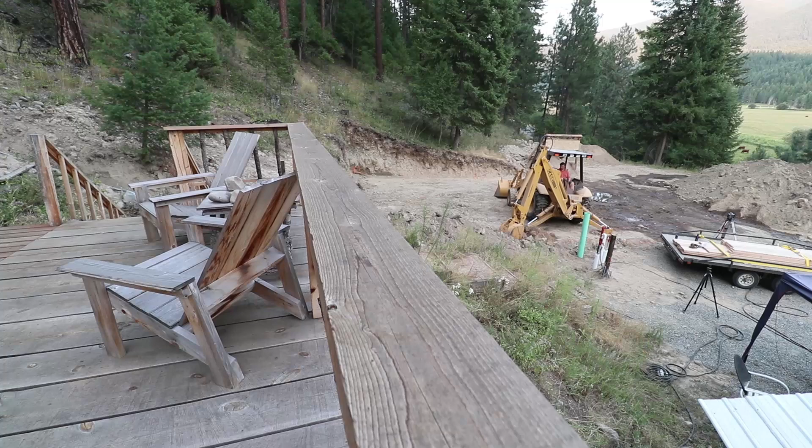Yeah, we had footing plans when we were doing the footings, and then we had wall plans when we were doing the walls, but we didn't have a complete house plan before we started. That's probably a completely different video as to why we did that and how it's worked out. But anyway, that's why we haven't shared our plans yet. Just a tiny bit of backstory.

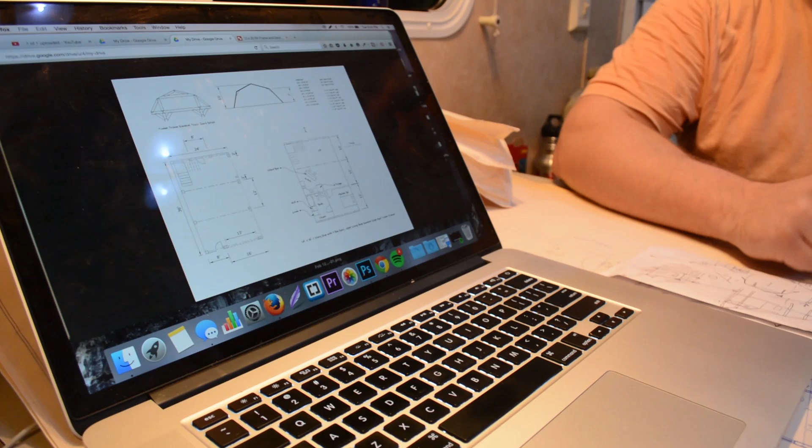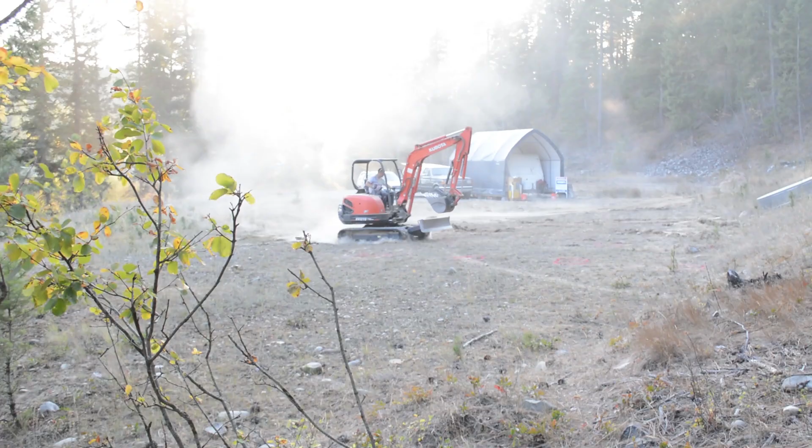We never planned to build this house this soon. This was our 10-year plan. And we're in year number 2, and we're starting the house. When we first arrived, we had drawn a very simple 24 by 36 gambrel roof, timber frame garage with an apartment above it. And we had dug the footings and we were ready to go. And we decided not to build that. We had a couple of revelations.

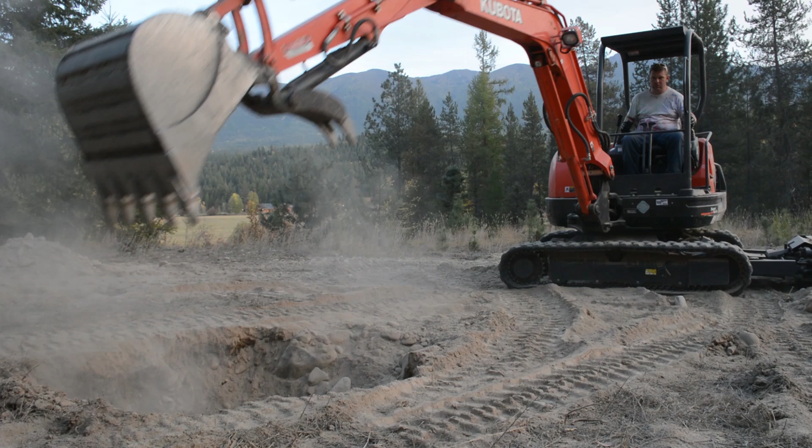One, our property is extremely hot. And because for the time being, we're off grid and we kind of want to stay that way, we realized really quickly that in order to make a home that was comfortable, we would probably want to harness the hillside as a method of maintaining a moderate temperature. So we scrapped the idea of building that house immediately.

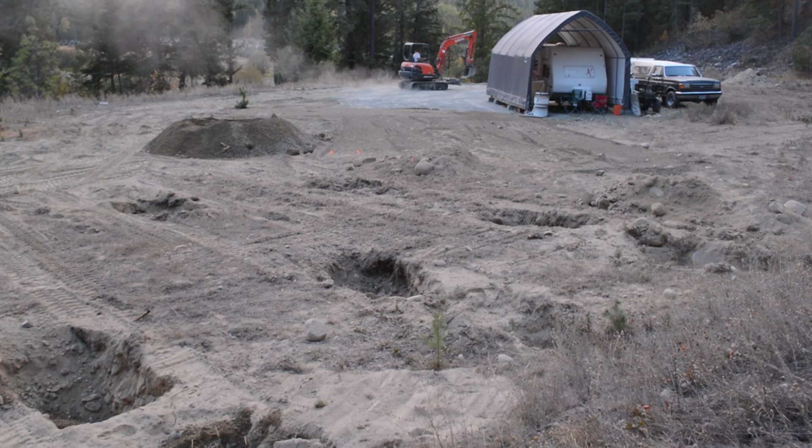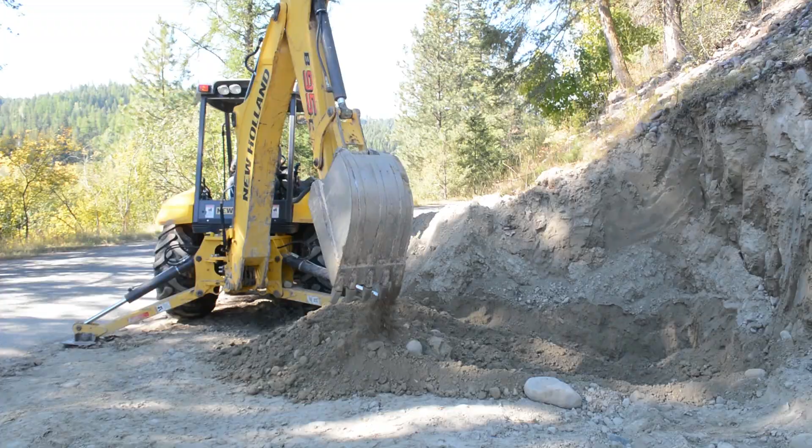We didn't really have a plan B, but life kind of got in the way, and we decided to explore and have fun with other things, such as gathering food, getting firewood. That's why we built the cabin. There was a lot of kind of reactionary steps. So, over the last 2 years, it's become obvious to us that we really don't know if we have it in us to build like 2 or 3 different houses on this property. So we thought if we could, we'd rather just build the house first, even if it takes longer and it's a little bit slower.

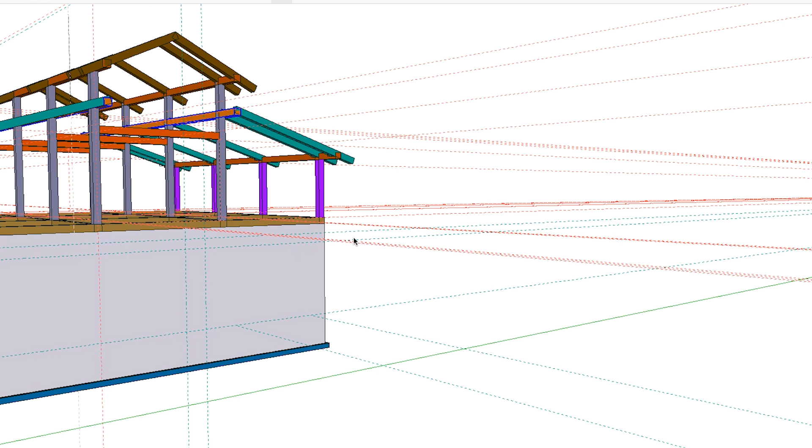For quite a while, Alyssa and I had talked about different house shapes, different house sizes, and it became obvious that we really needed to start working harder on the floor plan, because the floor plan really does dictate the structure in many ways. And so over the winter, I had taken a couple of days here and there, and I had worked on using SketchUp. And I had drawn up a couple of different timber frames that I thought we might like.

But I didn't fully understand the engineering behind those frames, so I couldn't confidently say we can build this. And that kind of led us to another conversation where we felt like we needed somebody to help us draw a more visual set of plans.

One thing that's definitely a marked difference between Alyssa and I is Alyssa is way more visual. She needs more details in order to fully visualize something. And having a good rendering of a home helped her to understand what I was trying to communicate with my chicken scratch and my 3D drawings.

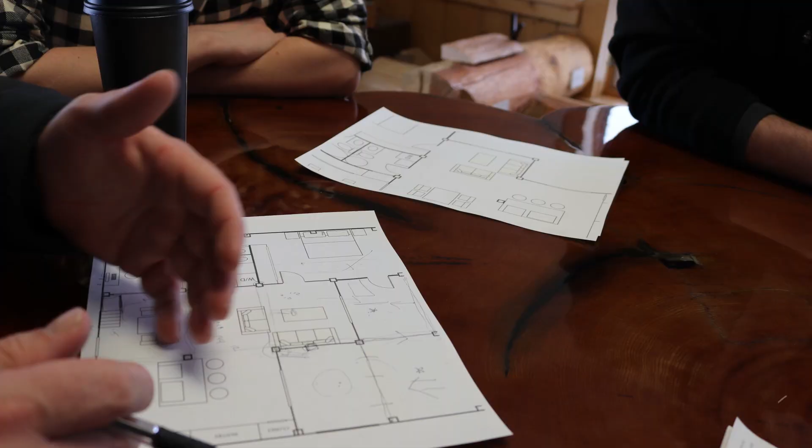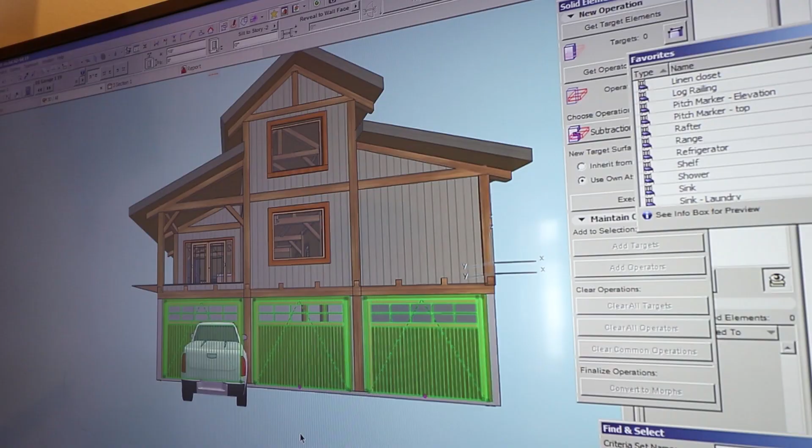So we ended up employing someone locally as a drafter to kind of help us conceptualize the structure that I had drawn. And they have software that allows them to put in roofing and materials and furniture and really make it look like a full home. Unfortunately, the outcome of that was a structure that wasn't really buildable, and our floor plan in that structure was atrocious. Let's back up a minute.

Here was our very, very first iteration. This is a 24 by 36. We, for some reason, I don't remember why, decided to go with the single pitch roof. We did that because of the south view. So our original plan before we even showed up to the property was a gambrel roof.

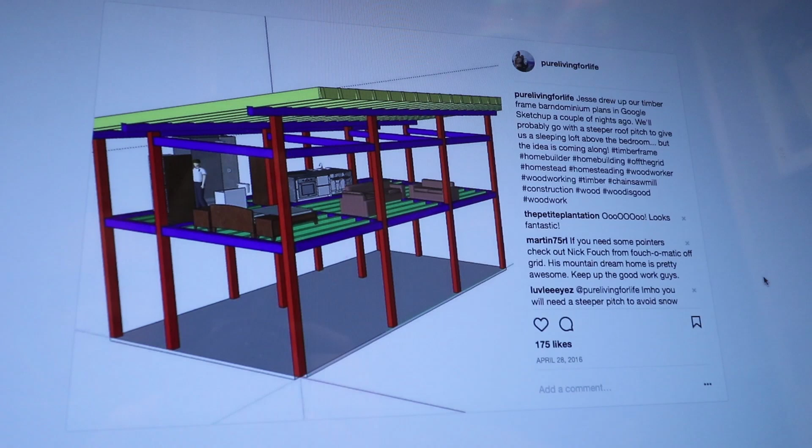And that was mostly because the length of the timbers to build a gambrel is shorter than the length that you need to build the frame you're looking at. So those rafters are very, very long. They're like 30 some feet long. But once we got here, we realized that with a gambrel roof, something like this, you would have very little light coming in from the southern side. I remember that. And so we thought that was a terrible design.

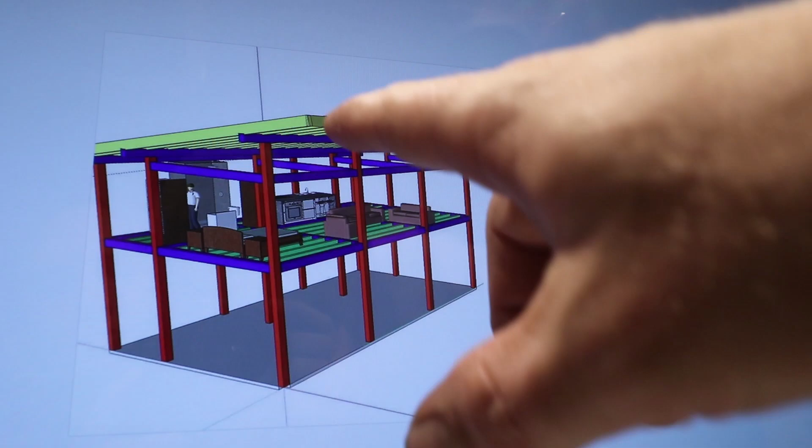And so we started rethinking the roof to capture the southern view of the property, which is something we've still done. And that kind of led us down the simplest method. My dad calls it a chicken coop roof, which is a single pitch structure. So that frame we just showed was a frame that we felt was too small.

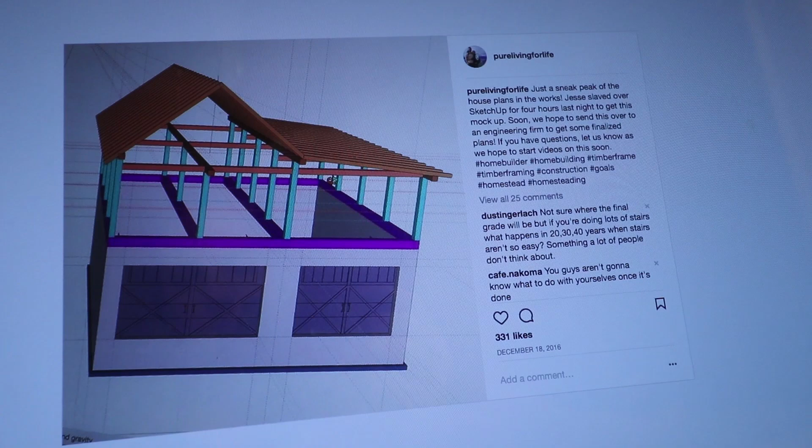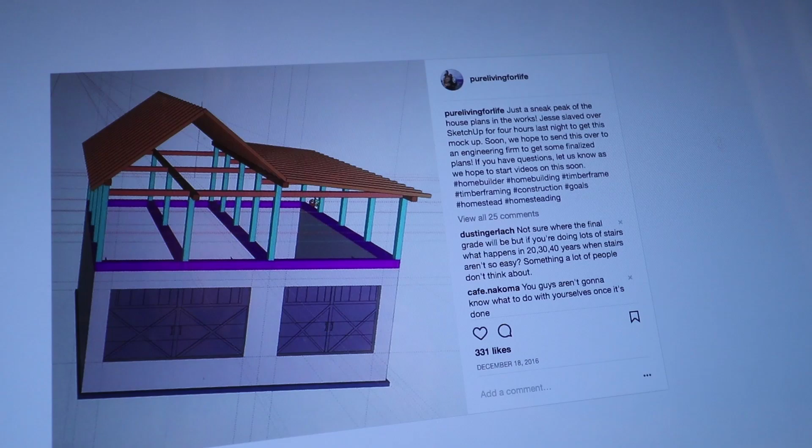And after we had met a local contractor, and he informed us that a 24 by 36 garage was not really adequate for what we were trying to accomplish, we began kind of exploring the 36 by 36 frame. This one I think was actually like a 32 by 36 or some slightly larger frame than a 24, but it wasn't a full 36. So it was a very awkward design to try to figure out.

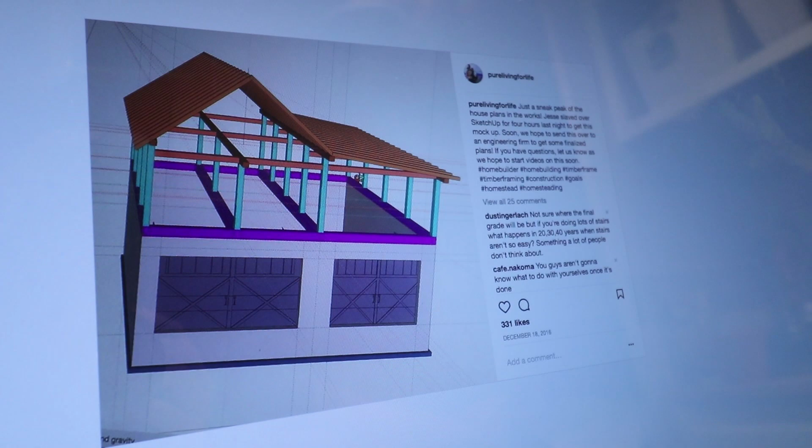And we were trying to break up this roof so that this wasn't one gigantic rafter. But again, we were trying to pick a frame and then make a floor plan that worked around it. Our biggest fear with this one was that it would look weird. Well, what's funny is when we went to the timber frame workshop in Maine, we actually got to see several versions of this frame, and they don't look that weird at all.

But they also weren't two-story on top of a garage. They were on the ground, so they had a more grounded look. Anyway, we felt the roof line was really kind of screwy. And that kind of brought us up to the next iteration of the plan. Well, even this, if you have a set of stairs going up to the loft, is going to be extremely small. So unfortunately, you're losing out on tons of space.

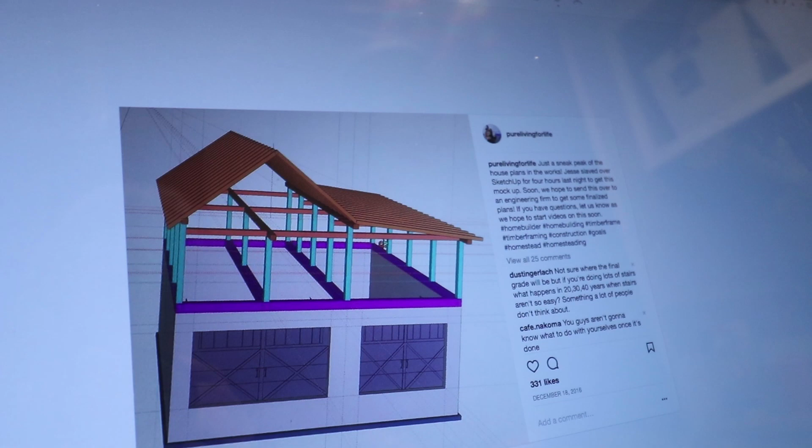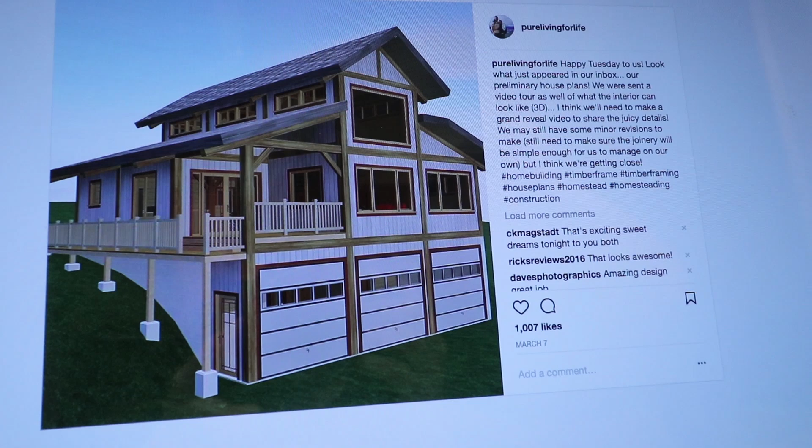Here was our third iteration. This could be built, but the company that we were working with to design this house, they focus a lot on using steel in their post and beam structures. And that's not something that Alyssa and I were super passionate about. We wanted to learn and use joinery. It was something we really wanted to do. And so this is a very buildable structure, but not for us. The overall design would have to be highly modified in order to make the joinery work.

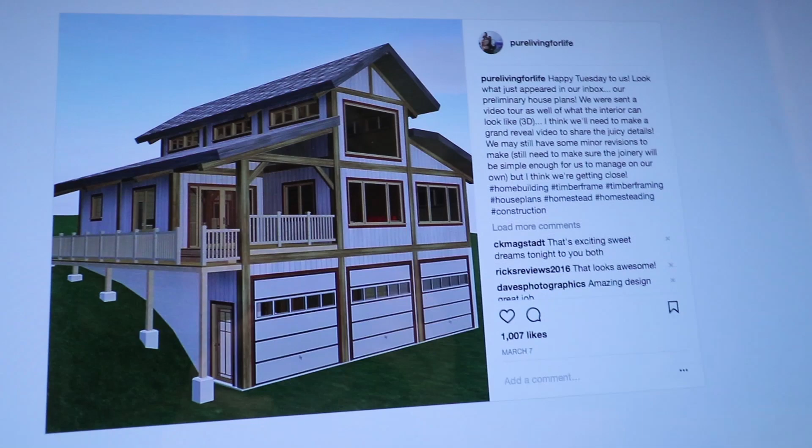And probably the biggest problem, so this design is actually a response to the previous roof line. And through conversation and kind of exploring different roof ideas, this design was decided upon. It's more of what's called a monitor style house. So you have a gable in the middle instead of on one side or the other. Back her up. And then you have a lean-to on either side. It minimizes the roof spans, which is nice. It gave us a lot of light up here because we had all these windows in this upper area.

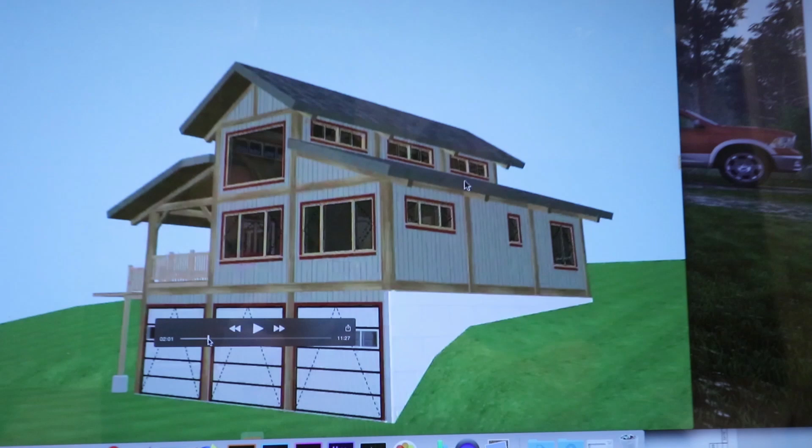But overall, we again ran into this massive floor plan bottleneck. So we couldn't figure out anywhere convenient to put stairs, which everybody tells us is a common problem. Doesn't matter what kind of house you build, nobody has room for stairs. And the floor plan just didn't feel open the way we wanted it to feel. Everything felt very boxy. Every room felt like it was very isolated instead of having this more open feel.

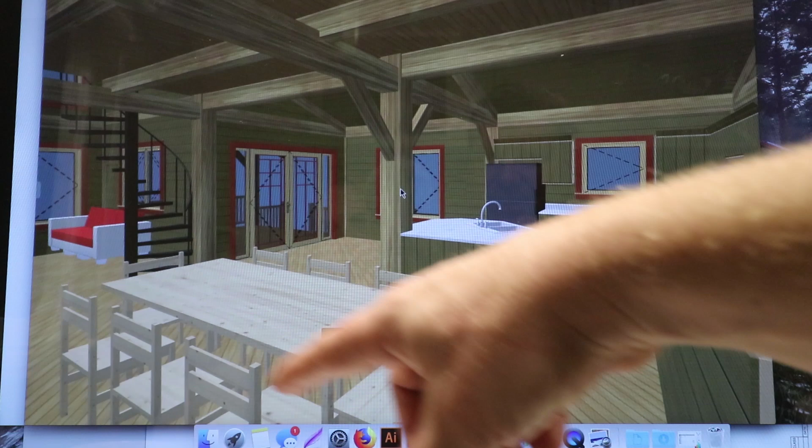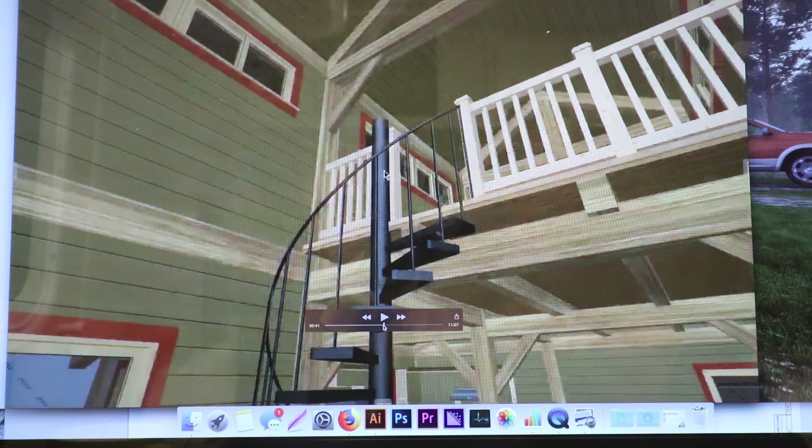Like this view from the kitchen, we felt if you could stand in the kitchen and look over to the living room, into the dining room, it would feel very open. But when you look at the layout of the floor plan, it doesn't feel that way at all. There's posts intersecting things. The living room is extremely tight. It's very cramped. We had, I think it was Shelter that cautioned against using a spiral staircase.

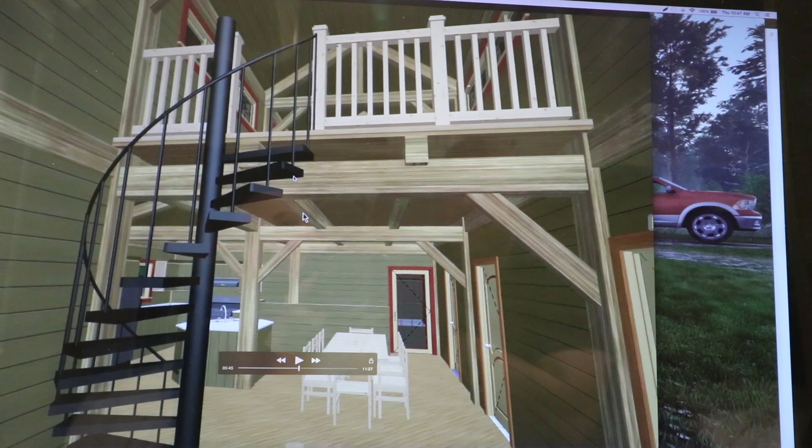They're extremely romantic, but the reality of them, they say if you can fit normal stairs in, you'll probably thank yourself. Especially if you plan to use the space. If it's not something you plan to use, then a spiral staircase is an acceptable alternative. But if it's a usable space... This wouldn't have been an everyday space up here, going up and down those stairs. There wasn't going to be a bathroom up there, no full-blown bedroom. It literally would have been a loft, probably for guests. Not a lot of privacy.

One thing we really wanted on our house is a wraparound deck. And for this particular set of plans, we decided to have the deck sitting within the floor plan versus building a deck on the outside of the home, and it really encroached on the floor space.

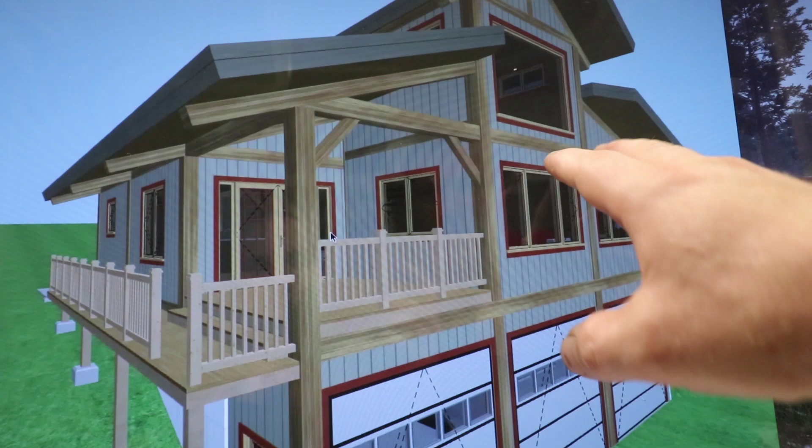Yeah, so with this structure, instead of bringing the walls all the way out to the eave, we actually recessed those walls slightly, and extended the eave so that we would have a covered wrap deck, which we wanted because we wanted to be able to walk between the front and the back of the house without having to go down to the ground. Because it's so far up off the ground.

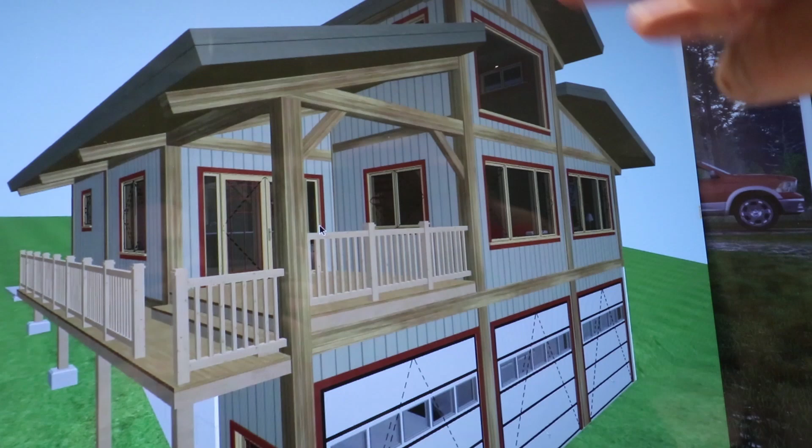And doing so makes it very difficult because of the roof pitch coming to this side, the east and west side. This was a really great idea, but the functionality of it we felt was maybe not as good as we had anticipated, and it cost us a considerable amount of square footage in the overall frame. So we decided that maybe that design needed to go.

So in the midst of all this, Jesse said, we need to take a timber framing workshop if we have any idea of building a timber frame together and keeping our relationship intact. Yeah, so maybe jumping back for just a second. So this would have been sometime in the winter, January, February, when we were working on this most current plan that we just shared.

But the previous summer, all summer long, Alyssa and I had done a couple of things. One, we purchased a bunch of timber framing books, and those are amazing books. Maybe we can share just a couple of those toward the end of this video in case you want to read up on the subject. We both read those books, but there was still this fundamental disconnect between the two of us on frames and structures and floor plans and some of these things. And so that made it obvious that we needed to do something hands-on.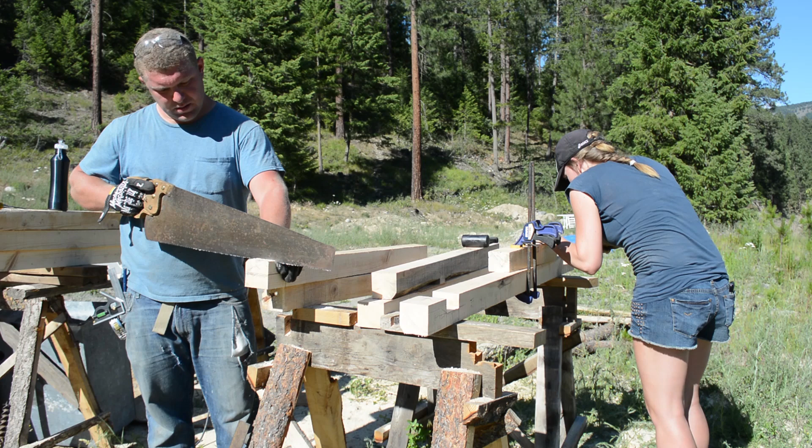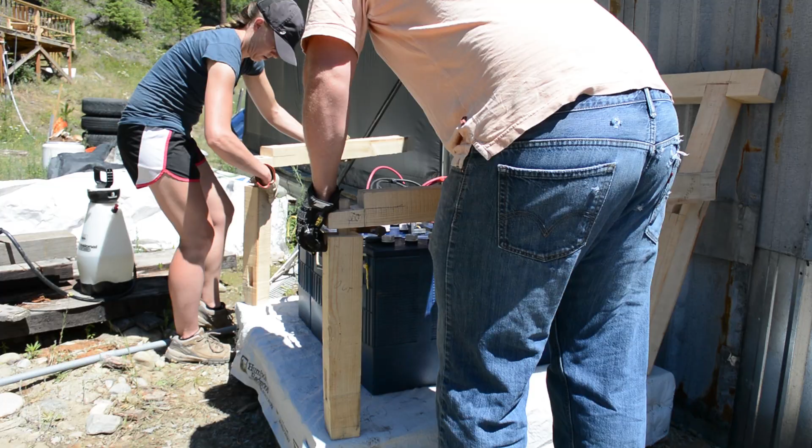Now, we had done a tiny timber frame together. It was our battery box for our solar batteries. It was a very small project. It took us a couple of afternoons on a weekend, and I felt like that kind of closed the gap for Alyssa and I. We were closer to understanding what we're building, but we weren't together. And that's when we said, if we're going to build this house, we have to build a timber frame, and we have to do it together, and it became brutally obvious we've got to take a workshop.

We settled on taking a course with Shelter Institute in Maine. We tried to find one closer, but some classes that were closer that we were interested in were already filled up, and we were looking for something like 2 months in the future. And a lot of timber framing workshops fill up long before that, and we weren't wanting to take one in fall because we were wanting to start building that summer.

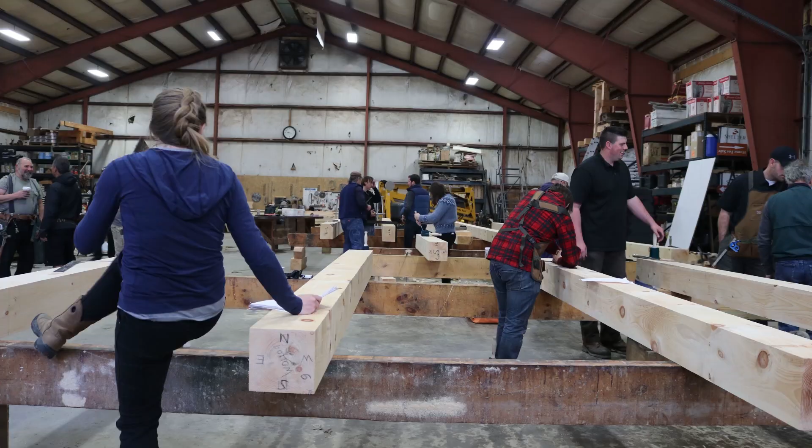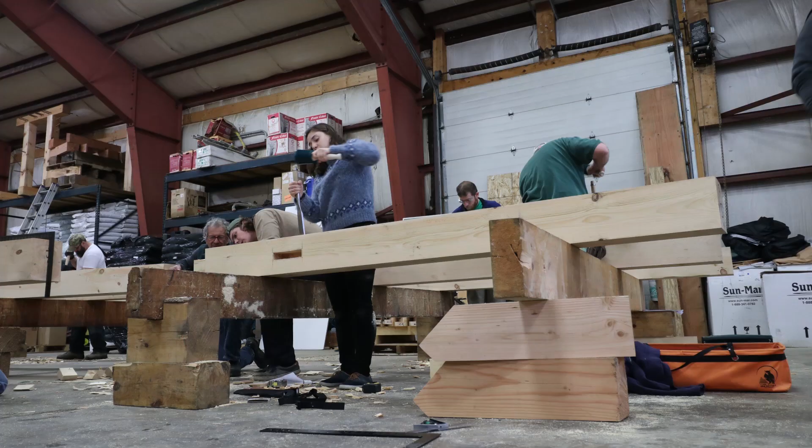And Jesse suggesting we went to Shelter Institute, I wouldn't say it was a hard decision for me, but in my mind, I'm sure a lot of people kind of agree with this feeling. I felt like we have this huge financial burden ahead of us and we need to save every penny for building the house. It was an investment. However, that class opened up our minds so much, and getting to know the Shelter staff was invaluable to us.

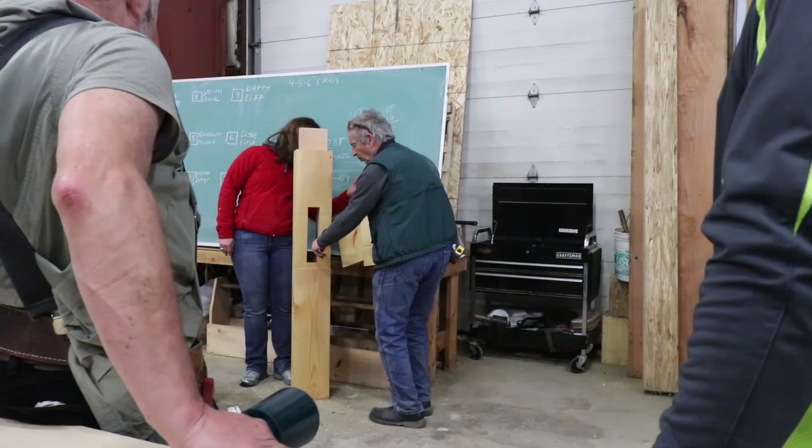And we realized that they were timber framers. Not only that, they do build timber frames, but they're really passionate about teaching other people how to timber frame. Therefore, they welcomed people like Jesse and I, where other businesses don't work with owner builders. So we are like a squeaky, annoying wheel because we have so many questions. We want to do a lot of the work ourselves, and Shelter loves that.

They told us that they were willing to be there for us to hold our hand as much or as little as we wanted. They were willing to engineer our frame for us. They were willing to let us kind of design our frame, but then be willing to step in and do some sort of consulting package where we could work with them on the questions that we had, call them up last minute, really be hands-on with the design, and that transformed everything for us.

For me, especially, I think one of the most exciting parts of the Shelter Institute's Post and Beam class is the engineering class, and they walk you through all the general tenets and principles of engineering timber frames. And I left the workshop thinking, yes, now I can design a frame confidently because I can sit and spend the time looking at different pieces.

And so we also learned a lot about some basic general rules of timber frames. One of those is what they call a stable gable, which is a 12 and 12 pitch roof over a certain width of building that does not require any additional supports to keep it from swaying, sagging, breaking, etc.

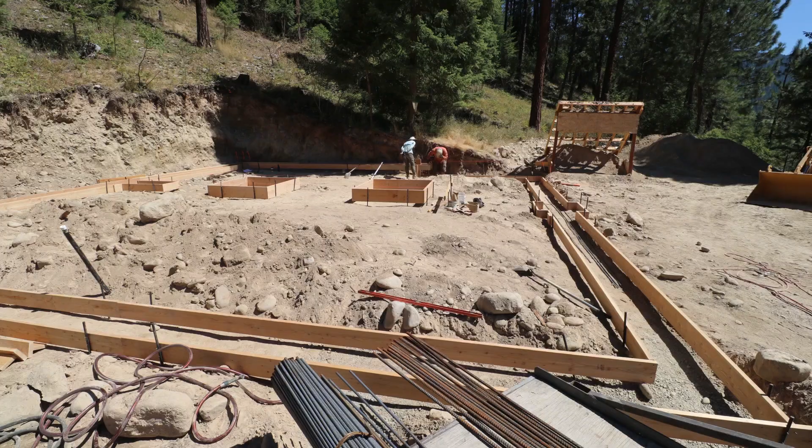And so when we finished the design, it couldn't be extraordinary and ornate. It had to be simple. Our goal is not to be on the front page of a home builder's magazine for the most epic timber frame house in the world. We were okay with boring. And I can say, after putting in a hot summer, I'm happy we chose boring. And I love our house.

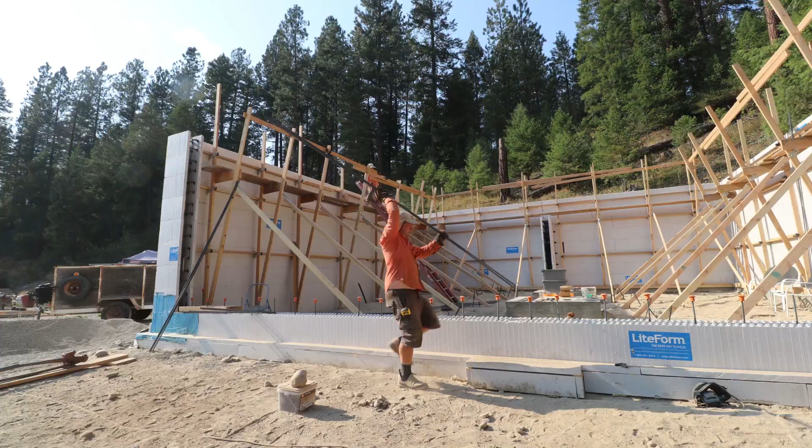Yes, we wanted to just stick with something that's tried and true and fairly straightforward, because we knew that the amount of bandwidth and mental power it would take to build the house would be far beyond our knowledge base, and we couldn't be sitting trying to figure out extremely complex things. We needed it to be pretty simple, a box with a roof.

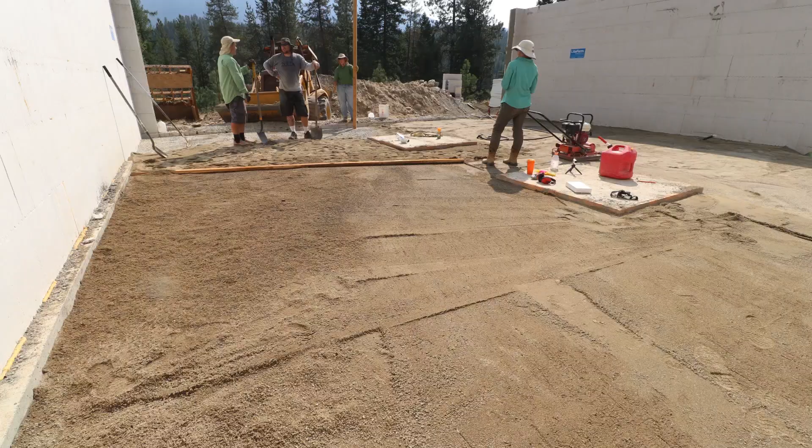And Shelter helped us understand the benefits of simple design. And so that also helped us kind of simplify that conversation in our head about the roof, which was something we had struggled with over and over and over. And we finally came to a conclusion that a simple gable roof, good enough.

Part of what was so attractive about Shelter's program for us was that they build a 24 by 24 timber frame, which is big enough you could do something with it. You could build a garage, a mother-in-law apartment. It could be a house, a cabin. It's a full structure, which is something we really wanted. Alyssa said earlier that we settled on Shelter. We chose Shelter. That's exactly what we were looking for.

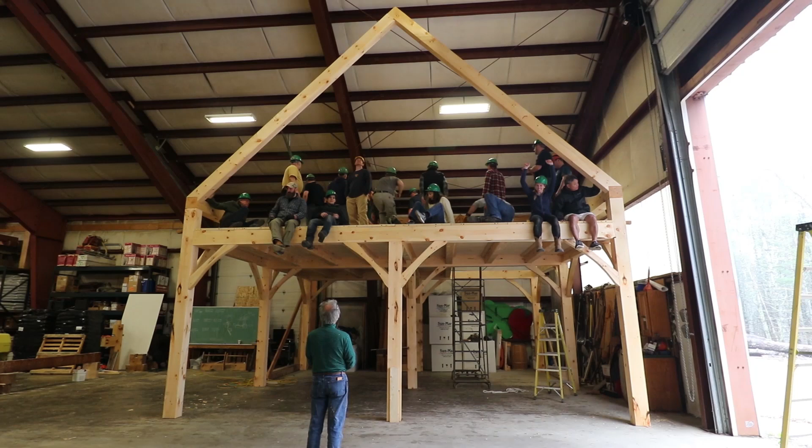And we were shocked to find it, because most workshops, in our experience, are wood sheds or small cabins or smaller frames that teach you the basic principles of timber framing, but they don't give you the scope that we're talking about when we're talking about building a house. And so we were stoked to find Shelter, first of all, and then that there was still room in the class just 2 months away.

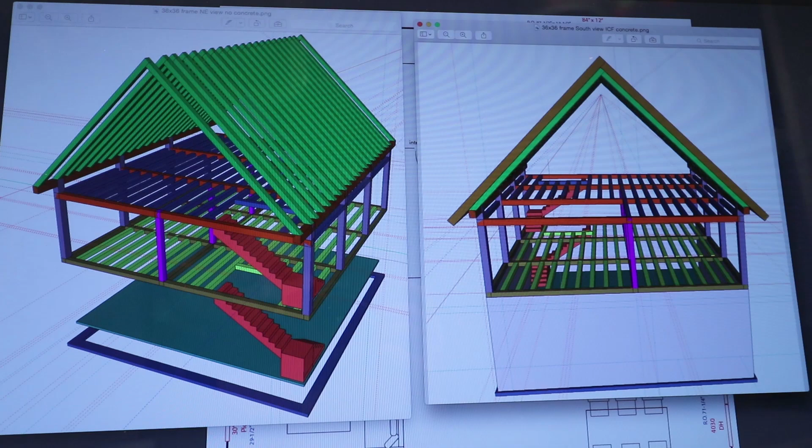So upon arriving home from the timber framing workshop, I revisited the plan that we had originally drawn, and this was one I actually had spent quite a bit of time trying to make the monitor frame buildable. And one of the big takeaways from the workshop was the maximum span allowable in a single bay, which was 20 feet. And so I began designing this frame around a 20-foot span here, which left us a 16-foot span here, and then designed the top plates and the rafters and everything based on the simple gable.

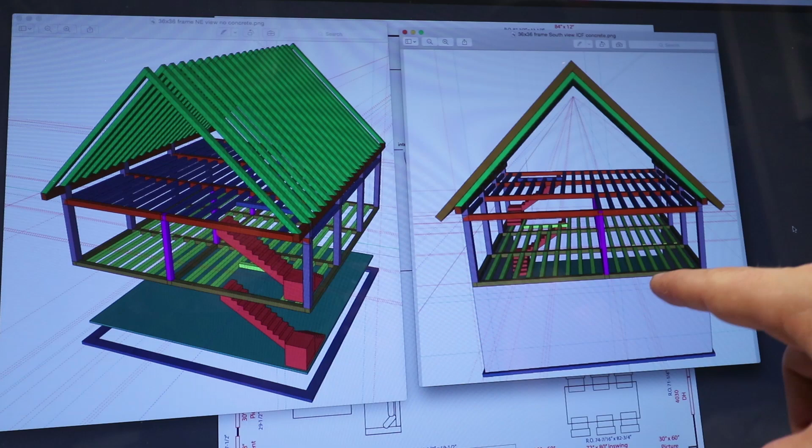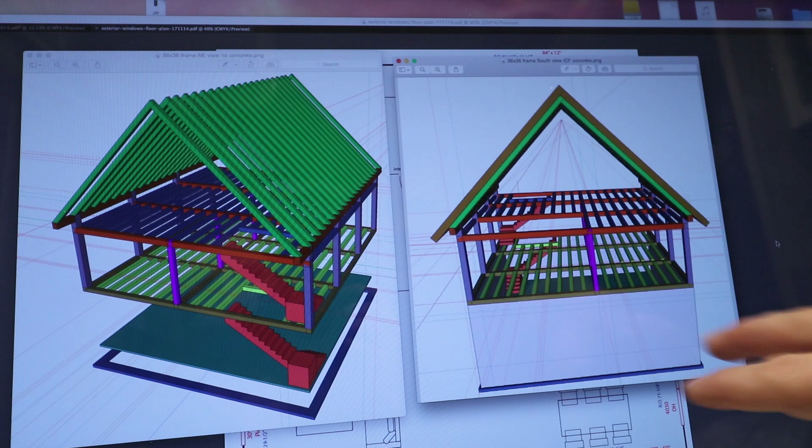And I actually used all the engineering calculations from the workshop to build this frame. So I felt really confident that this frame was buildable. And no one can deny the amount of loft space that we gained by building such a massive roof. This frame, Alyssa and I both liked. We felt that the roof really complemented the height of the structure. That all made sense. Suddenly we had room for stairs both below and above, and the possibility of having more living space without really putting in any extra effort in building the house.

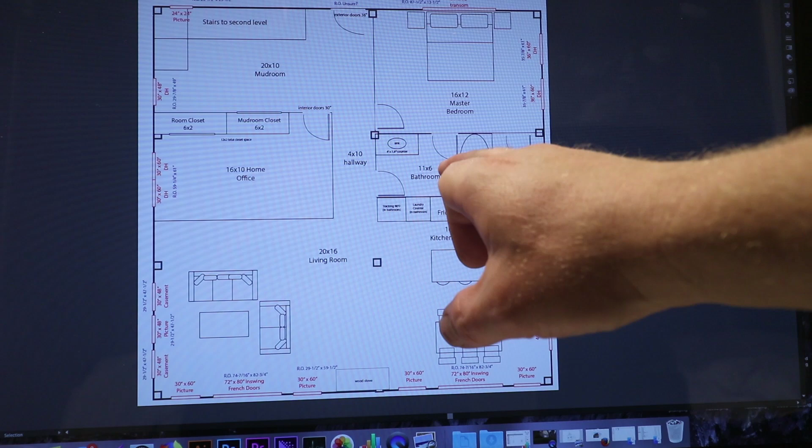While Jesse was doing the engineering on the frame, the floor plan was more up to me, which I'd say worked really well. It took a lot of just moving things around and even tweaking stuff ever so slightly. So for example, the bathroom here, Alyssa really wanted a walk-through bathroom. She wanted to be able to access it from the master, but also from the living area. And that's because we do have a small space and we can't fit 2 bathrooms in there, and we wanted the master bedroom on the living level because we don't want to finish the loft right away. At the same time, we want the option of still closing a door and having somewhat of a private bathroom. So in a small space, I think that worked out well.

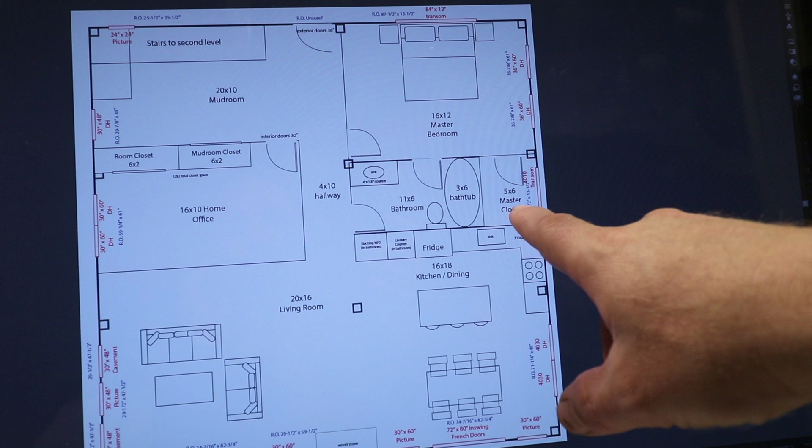Yeah, so it took a little bit of exploring because we wanted to make sure we had a pretty generous closet, which even 5x6 isn't that big, but it's a decent closet for the master. But for example, this post here could be a problem because there's a sink, and so that post is going to intrude a little bit on the interior space.

And we wanted to make sure that we had a very open feel from the kitchen into the living room. We wanted to feel like this was one big space instead of all broken up. And so we needed to play around with, because we had originally talked about putting the kitchen up here in the upper corner, overlooking the hot tub deck, etc. But then the kitchen is its own room, and you're very detached from the rest of the house, which I never want to feel.

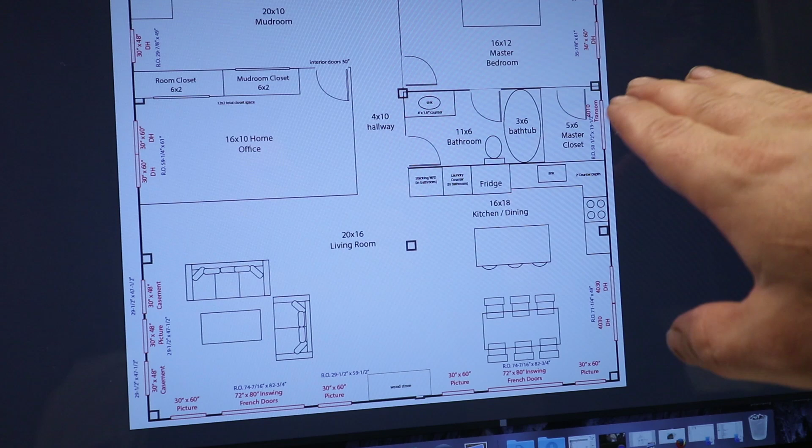And we decided that we're going to spend most of our time in the living area. Therefore, that's where the view should be, and we'll sacrifice on having a view from the master bedroom. Yeah, and I mean, we want privacy in the master bedroom, and we want it to be cooler in the summer for sleeping, so it makes sense to put it in the northeast corner. Probably the coolest room in the whole house will be the master bedroom. It'll be cold in the winter, but for us, adding heat is much easier than cooling something down.

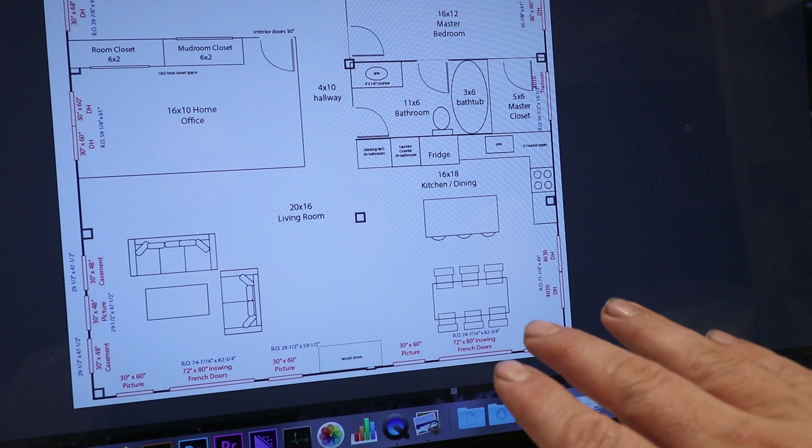We have such a beautiful view that we wanted to make sure that the southern exposure was really rich. And so we wanted to design around having the living spaces on the south side. And we wanted to design around having a lot of natural light coming in. So Alyssa really did move stuff. I mean, I can't tell you how many times this floor plan changed.

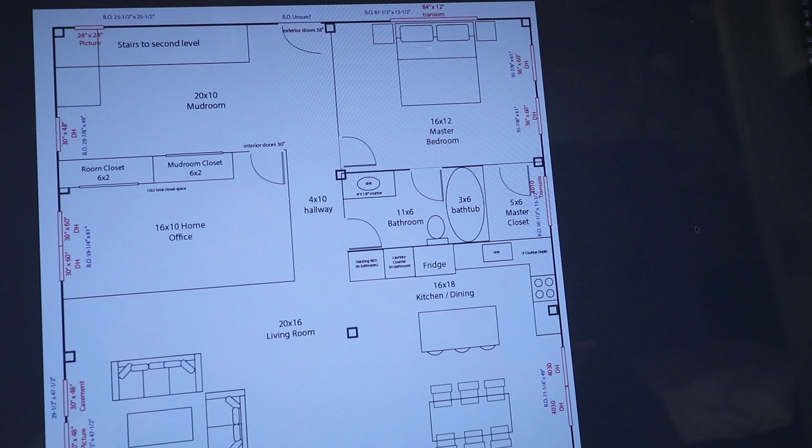We wanted an office or another bedroom. We have no idea what it'll be used for in the immediate future. It's just another space. We wanted a mudroom, a pretty large mudroom, because, let's be honest, we use that more than our front door. This is where the stairs will be coming up from the garage, and then there'll be a door out to the hot tub deck or the back of the hillside. And we feel like this area is a great spot for all of our muddy boots and our jackets. There's a closet accessible from the mudroom.

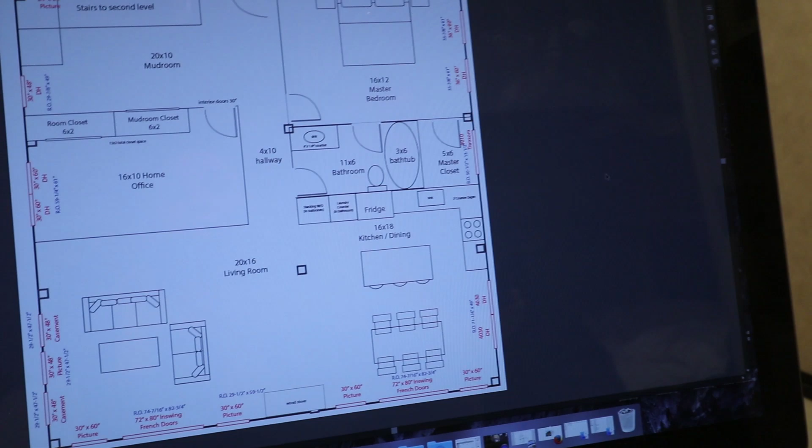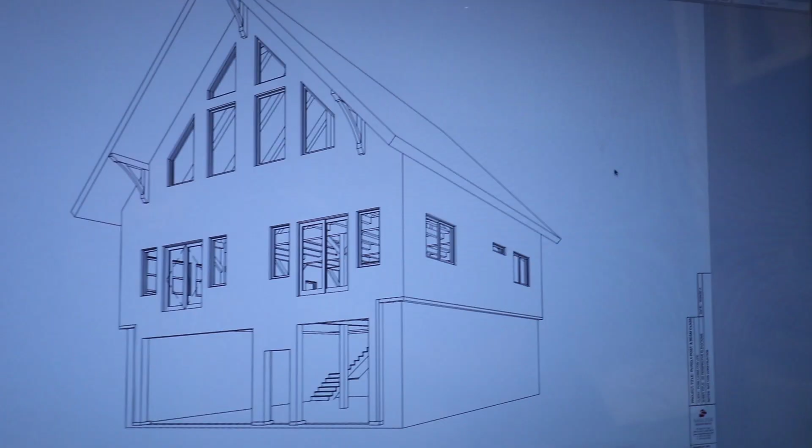The loft we haven't really decided on. We do want a second bathroom in the loft and maybe a bedroom, but this main living level floor plan will serve our needs for a very long time. Another reason we designed the house this way is we wanted to really think about the flow of people. So we planned to have a deck in the front, and so we wanted to be able to walk in and go straight to the kitchen and not have to walk all the way through the house to get to the kitchen. So this will probably down the road become the main entrance. For now, our main entrance will be through the garage.

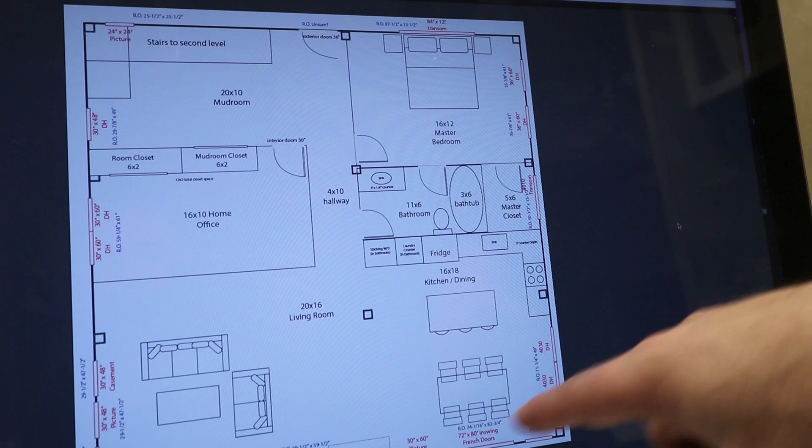And kind of jumping back, we wanted to think about flow. So for example, we want to be able to come up through the garage and go out the back door so that we can go out to the back patio without walking through the house. Conversely, if you want to come from the hot tub deck, come inside and go down to the garage, you can do that without walking through the house. So really, flow was a huge consideration with the floor plan here, to make sure that you're not constantly walking from one end of the house to the other to access different areas of the property.

Should we show them the video? What do you think? Yeah, I think this is probably a great time to kind of show, because we've shown them a lot of what we would call 2D elevations or just drawings. Alyssa put a lot of effort into getting a rendering creepily lifelike of this floor plan in real space, and I can't even tell you how amazing it feels to have that information. Here she is.

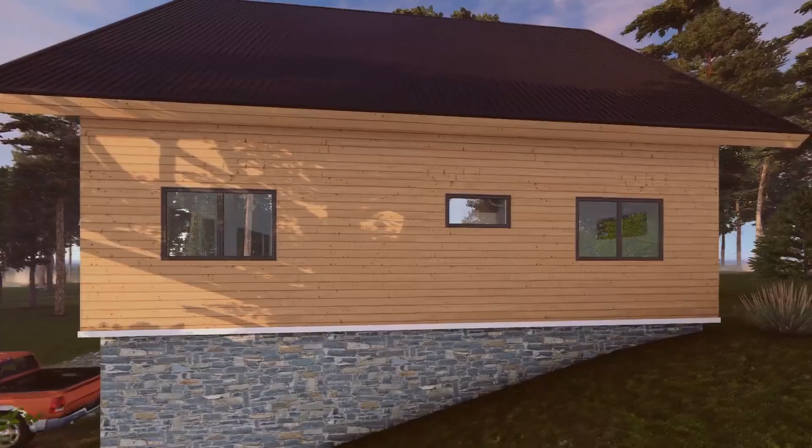So having this rendering really helped us to visualize the exterior, the glass, the ratios of the building, and kind of looking at finishes, things like that, even though this is so far in the future. But it really did help us to visualize what the structure could look like when it is finished.

And at first, the roof looks absolutely massive, but we felt like the large roof really offset or balanced the height of the overall structure. It didn't look like this massive house with this weird shallow roof.

I think we're going in. Watch out! Watch out! Who's flying this drone?

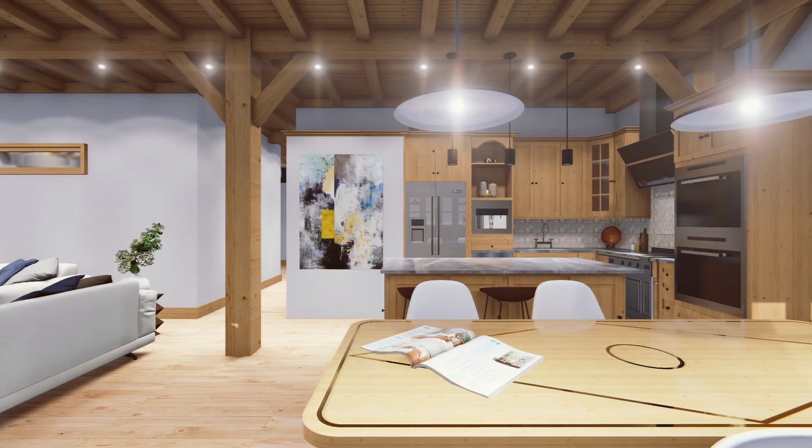And then, of course, for Alyssa, the interior, helping her to visualize what could fit, how it looked, the finished quality. What's hard is when you're designing on a computer screen, it's easy to think you have a ton of room or not a lot of room. And when you see things more real life, you can actually see what that space is going to look like.

So, for example, the kitchen, we were concerned that the kitchen would be too small. So we spent quite a bit of time really thinking about counter space and stuff. And we love islands. So seeing that island sitting in the kitchen really helped a lot and kind of gave us a feel, because we feel like the counter space is quite limited in the kitchen, but the island really opens that up, and it gives the kitchen kind of a more cozy feel.

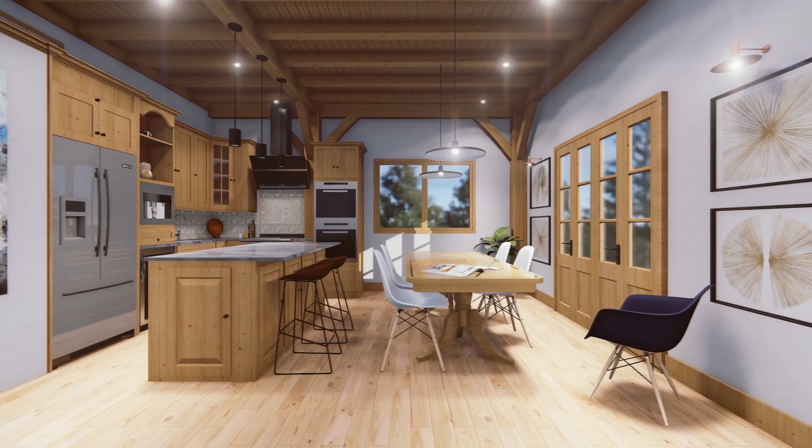It also helped us to visualize the light from the outside and kind of getting a feel for how shade and shadows and things would feel in that area. The kitchen is definitely not massive, but we feel like having a considerable amount of glass on the front, which would be the south and the east side, helps to make you feel like you're kind of outside. So while the space isn't massive, it doesn't feel cramped either.

We wanted the living room to feel both cozy, but also to feel like it's expansive. Clearly the frame is not massive, so we felt like using a considerable amount of glass and windows would help you to feel like you're outside, enjoying the exterior, but also it's quaint enough that you feel kind of closed in and cozy.

We'll talk about windows probably in another video because we've spent like 2 weeks on windows alone, and this rendering is not 100% accurate. For example, these windows are a little too high. They're not flush with the top of that door. We're going to have 3 here instead of 2. They're not going to be pushed up to the frame, so don't judge this based on the windows. This is going to be a full window, not like a halvesy, and we're going to have sidelights on the sides, so there's going to be a lot of glass on the south side.

Yeah, using the southern light was something that we really wanted to maximize, so we had as much natural light in the structure as possible. Kind of jumping back, we opted to not put any skylights and no sun tunnels in our roof. We wanted to keep our roof in one piece if we could.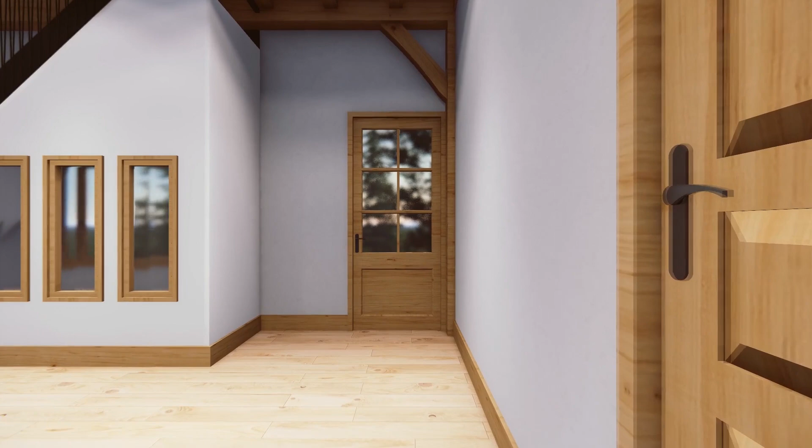This hallway feels really tight in this drawing, but it's 4 feet wide, which is actually a really wide hallway. So this is the mud room where we will actually enter, but we have to go through an imaginary door because it's not shown in this rendering. These 3 windows you see are just to allow natural light into the stairwell that goes down to the garage. They're going to be opaque, so you don't feel like you're looking down into the garage, but they provide a little bit of natural light so you feel less claustrophobic or pitch black as you dive into the garage.

This area will probably be quite used. We plan on stacking groceries here or taking our boots on and off. Feel like this area is going to see a lot of use. We put closet space in here because we wanted to be able to put coats and things away as you come into the house.

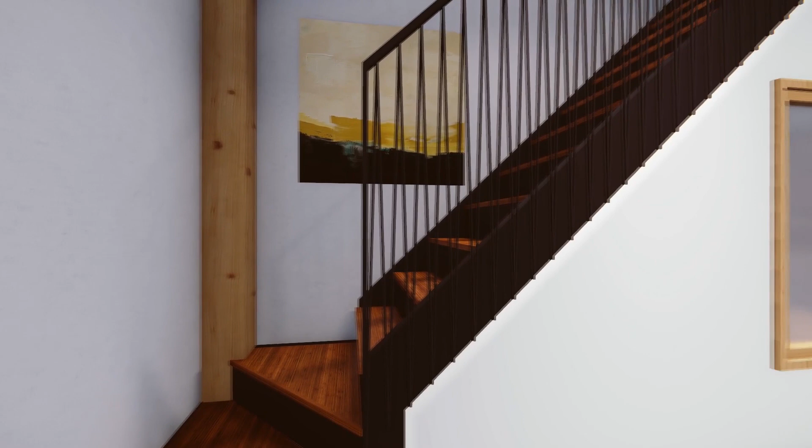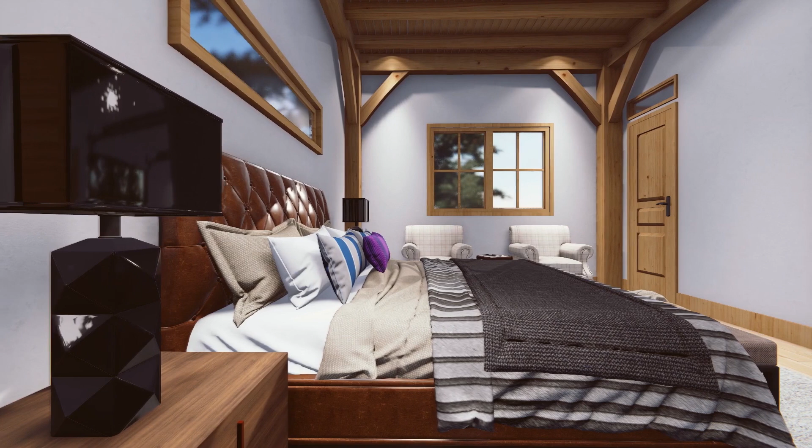Here's the master bedroom. One of the things that we really wanted in the timber frame was pretty high ceilings. As it is right now, the height to the bottom of the floor joist is about 10 feet. So even though the room isn't really big square footage wise, I believe this master is 12 feet by 16 feet, the height of the ceiling is going to make the room feel spacious.

It also gave us room for a transom window over the bed, so that we maintain privacy and insulation, because that's on the north wall, and you want to have minimal glass on the north wall for heat loss. But it also will let in quite a bit of natural light. And because of that, we actually have transom windows above the closet and the bathroom to let more light into those areas without having to turn on a light.

One of the things that we designed into this room was making sure that a king size bed would fit. We're not sure if that's something that we'll actually have or not, but we wanted to make sure that it fit well and that it wasn't an afterthought in case it's something we decided to add in later.

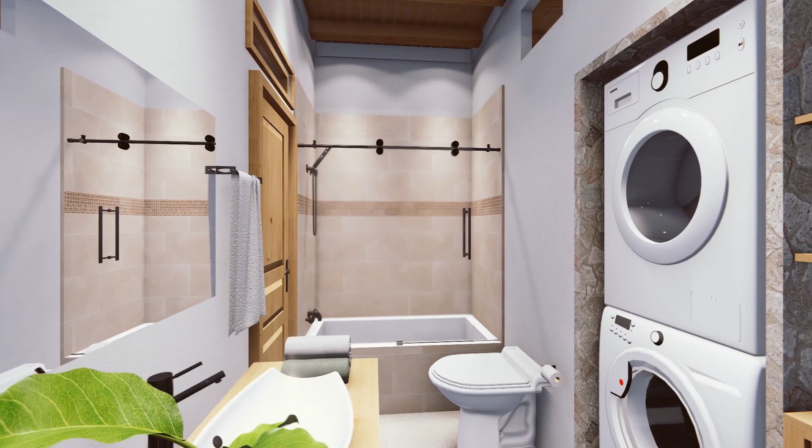So it was really challenging because we had some minimum bathroom size stuff that we were working with, and we didn't feel the need to use up a lot of square footage for the bathroom. It's going to be fairly tight, and it's a multi-use space. So the bathroom door can open. It's going to cover up this folding table and this storage area. We're okay with that. The stackable washer and dryer makes this a multi-use room instead of having to have a separate laundry room.

Yeah, so we spent a lot of time designing around normal sizes for fixtures. So Alyssa made sure that there's enough room in there for a tub shower. And then you also have to look at how much space you need around the shower, the sink, the toilet, and make sure that those don't overlap too much. So there's a lot that goes into designing, and I think this might be where more of an architect comes into play. Yeah. And Ethan was helpful in a lot of this stuff. He was able to tell us, yeah, I think you have enough room there, or no, that door is in the way here. You're going to need more space.

Little things too, like for example in this rendering, I can tell you that if we actually built it, the door would need to swing the other way. So the doorknob is going to be blocking the access to the bathroom. So these are those little things that you have to really think about as you design a space, the flow of the space, to make sure you don't have something blocking something else.

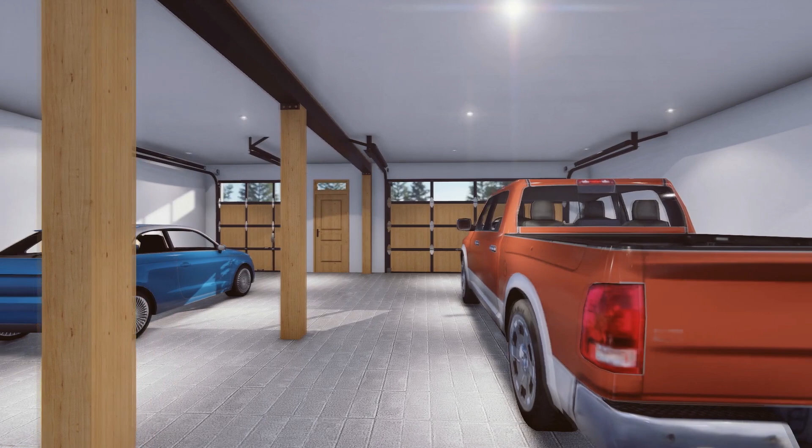The garage is pretty straightforward. We actually have a 16-foot garage door on the west, which is a 2-car garage. Then we have a man door or a woman door, depending on what kind of person you are. And that access is kind of a workspace, and then an 8-foot garage door. That side of the garage is just a workspace. It's not a shop. It's just a place that's weather protected and climate controlled, so we can work all 4 seasons inside, canning, fixing things, working on tools, small woodworking projects, things like that.

We wanted to make sure that we didn't have a separate building that we had to heat, plow, roof, paint, and take care of, so that we could do small projects. This is not a shop. Someday down the road we'll build a shop, so we have that space to work in, and we can get Grease Monkey crazy in there.

In the garage we do have a full bath. Even though it's going to be fairly small, we wanted that because our goal is to initially move the RV into the garage so that we can be more climate controlled and protected from the weather. And so we wanted to make sure that we had a full bath downstairs. Right next to it is our mechanical room, and that's where our radiant systems will be housed for the concrete slab. And solar batteries, inverters, electrical, water main, all that fun stuff will actually be in the basement.

This is actually fairly representative of how the garage will be finished, as in it will be sheetrocked. We even got our dang buttress and our steel beam in here. Yep, they did a great job rendering this stuff out. So we've got posts, as you can see. There's actually a post there. We actually have a piece of sewer sticking up here that's not rendered. But anyway, this will be a somewhat finished looking garage when we're all done. We'll have to sheetrock all that for fire protection, especially with cars below the living space. You want to make sure there's a fire barrier there.

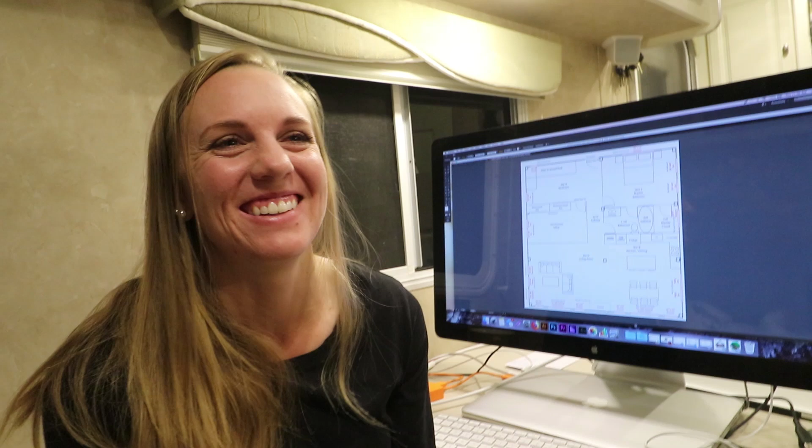And we try not to get frustrated too much when we have insights about how we built the house that really frustrate us. And there are times, like somebody told me, I think it was our concrete guy, Eric, told me he's been on builds before that went through an entire architect, through a designer, through a drafter, and they had been approved by the contractor, by the customer, and everything, and they were digging it and went, holy crap, how did nobody notice this? So you can only design on paper so much, and at some point you've got to build the house. And that's where we are. We're just building it. We feel like we've spent enough time planning that we feel confident we can actually build this structure.

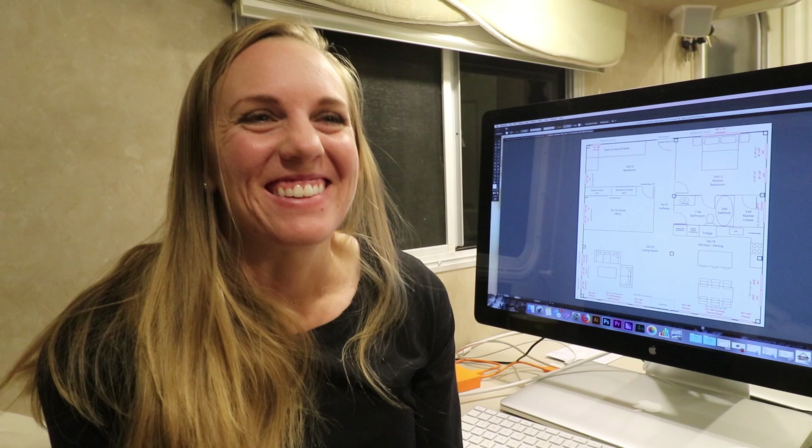And we did actually consult with Bugaboo. He really only had one thing to say. He wants his own cubby. He wants lots of space to crawl around in and meow a whole bunch all the time. So his thoughts have been considered in this design. We made a timber frame so that he can run around like a crazy cat on timbers all day.